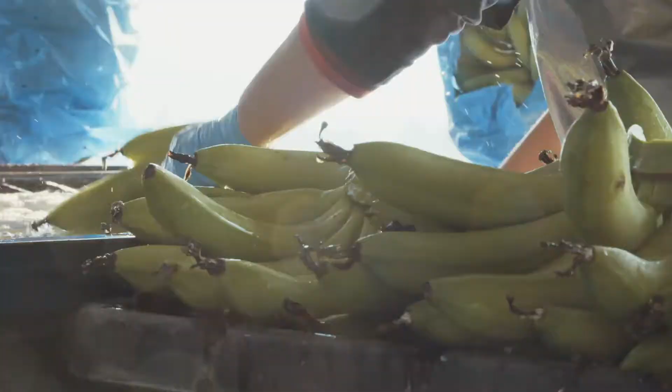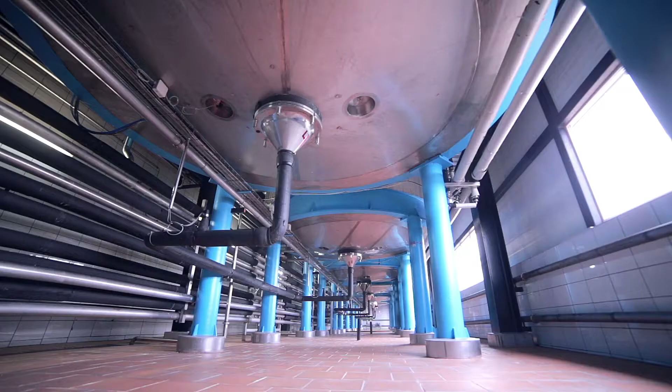Water is an essential element for the food processing industry. This fact implies that a high volume of wastewater is produced with compounds of interest that are not valorized. The current processes applied to wastewater are focused on its treatment before discharging to the environment instead of reusing the water. It is therefore essential to recover compounds of interest to produce value-added products and preserve water resources following a circular economy approach.

Within this framework, a group of European SMEs and RTD performers have promoted Afterlife, a project funded by the European Union's Horizon 2020 Research and Innovation Programme. The Afterlife project proposes a flexible, cost and resource-efficient process for recovering and valorizing the relevant fractions from wastewater.

The wastewater from the food processing industry goes to a filtration cascade that separates all the solids in the wastewater. In this way, pure water plus compounds of interest are obtained. The water thus obtained of high quality can then be reused.

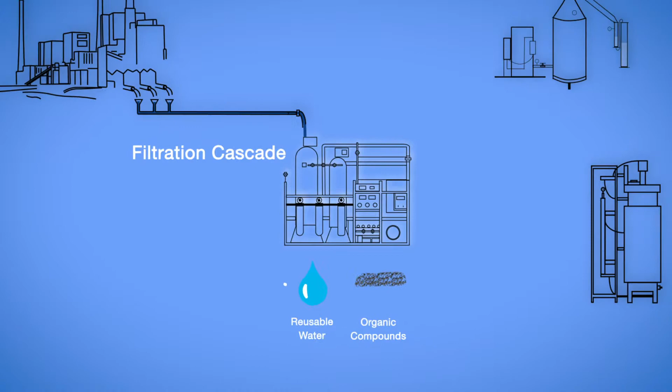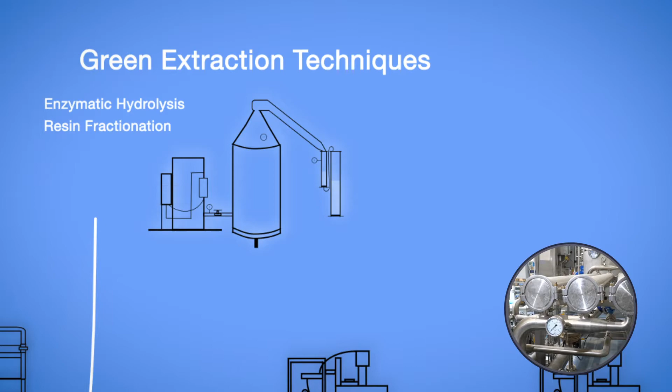The recovered compounds are processed with green extraction techniques such as enzymatic hydrolysis and resin fractionation as an alternative to the use of hazardous solvents for the extraction of high value-added compounds such as flavonoids and limonoids that can be used in the food or cosmetics industry.

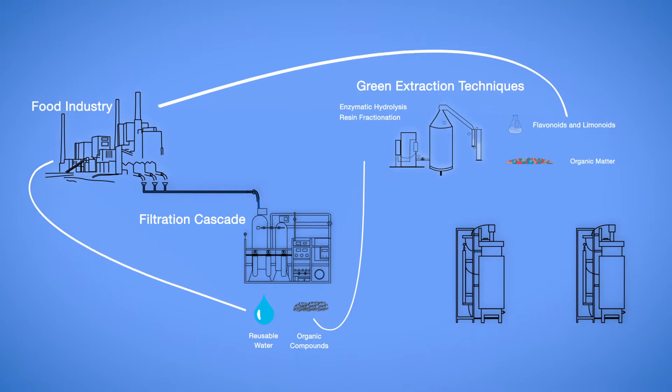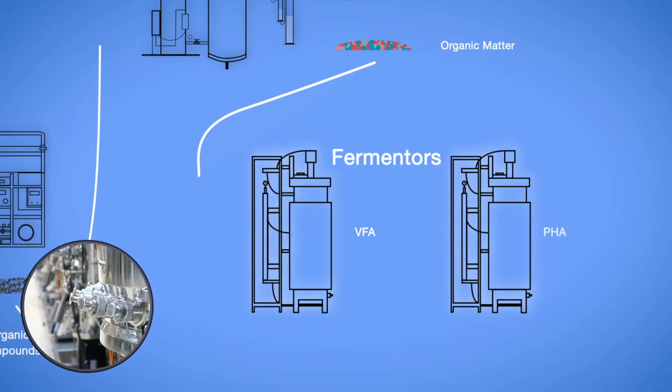The rest of recovered organic matter goes through two processes, the conversion into VFA and the subsequent conversion into PHA, thus producing biopolymer that is the base for the production of bioplastics, which can be used in other industries or in the food industry as packaging material.

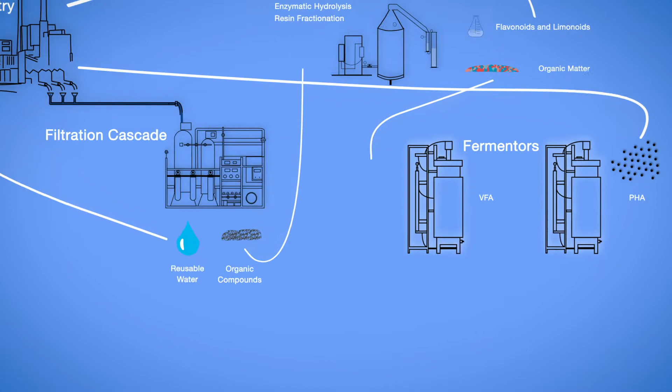The VFA not converted into PHA goes into anaerobic digestion for the production of methane, a source of energy to be used in the own process.

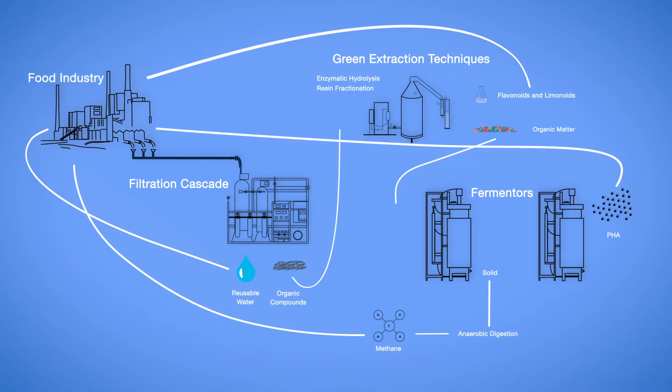The different steps of the process have been optimized by the partners in different locations for their subsequent assembling in a prototype located in BBEPP facilities in Belgium.

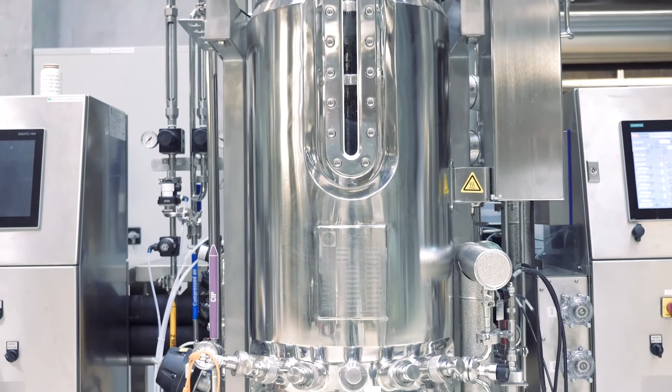Afterlife leads to better recovery rates compared to common technologies by targeting the recovery and valorization of 100% of nutrients and organic matter in wastewater. Moreover, Afterlife promotes the cooperation among the food processing industry, waste management, plastic compounder, and natural additives producers.

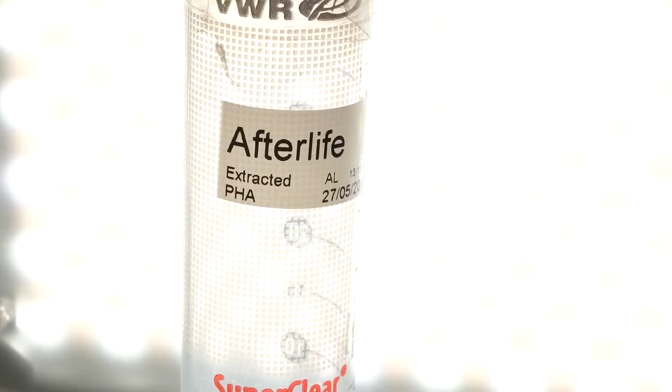Afterlife: a substantial positive impact in the progress of wastewater treatment technologies and relevant fractions recovery.